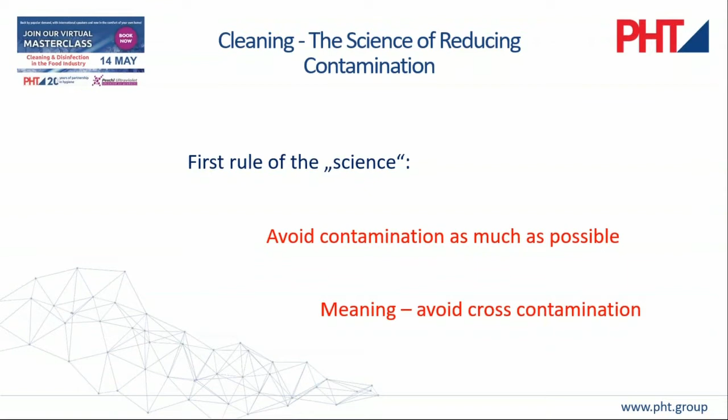And when we talk about avoiding contamination, it's basically please avoid cross-contamination. That's something which doesn't cost you a hell of a lot of money. It's just something you have to plan and think about — where it comes from, where does the contamination come from. And when we talk about cross-contamination, let's start with the personnel flow.

Cross-contamination in terms of personnel is one of the most important things which you should do. And that's easy - you just have to do it. When you think about the change room, make sure that people coming from the outside and people who are properly dressed and going on the production floor don't meet each other, don't hug each other, and don't have too much contact, because that's where contamination comes from. Again, nothing which costs you a lot of money - just make a plan so they will not meet and you don't have cross-contamination.

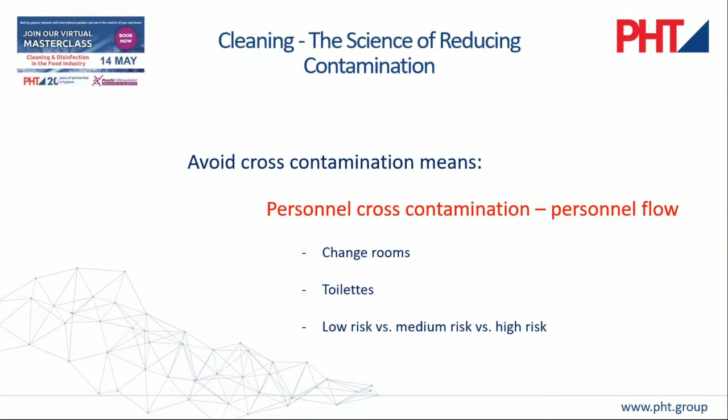The same with the toilets - make sure people coming from the toilet have proper personal hygiene before they meet other people. Again, when you look at low risk, medium risk, high risk areas, it's fine - just make sure people working in those different risk areas don't meet each other without having some lobby in between, however it looks. It doesn't have to be fancy - it's just a matter of planning the personnel flow the right way. That's all there is to it. It's not a big science, just a couple of small things done right. So avoid cross-contamination between all areas with different hygiene levels. That makes a huge impact.

We talked about the personnel flow, but we should talk about product contamination as well. Make sure that products which come from different areas don't meet each other - for example, raw and cooked products. Make sure in your product flow on the production floor that raw and cooked products don't come close to each other. Packed and unpacked products - make sure there is a lobby in between, however it looks. Again, it doesn't have to be a fancy lobby, just make sure the flow is right.

Packaging material versus food products - make sure that wooden pallets and other stuff are not on the production floor right next to open meat, for example. Those things have a huge impact, and we shouldn't talk about cleaning before we get this right. It's the same issue - just make sure that in areas with different hygiene levels, the products don't have contact with each other.

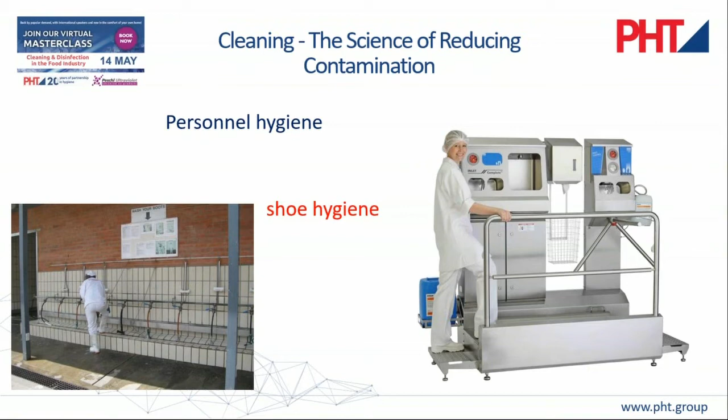Therefore, we believe in a walkthrough system, however you call it. Coming back to what I said before, to divide the dirty side or the clean side, between dirty and clean, between white and black, however you call it, in terms of dirt. That's the only thing which makes sense. Otherwise, you do things which don't really make sense.

And then when we talk about the personnel flow, as I said before, we have, of course, to think about the factory itself as well. Beside the fact, again, that we have to avoid it, we have to think about the factory hygiene. And even here, that's why I'd like to repeat it again.

Think about it: if you have to clean something, then please think about, you need time, you need temperature, you need some type of chemicals, or not only one type. We heard about resistancy. That's why we choose always to say, if it comes, for example, to foam cleaning, you have to swap between, let's say, an acid and an alkaline, or at least between different chemicals, so that the bacteria does not get used to it, because otherwise it will not work at all.

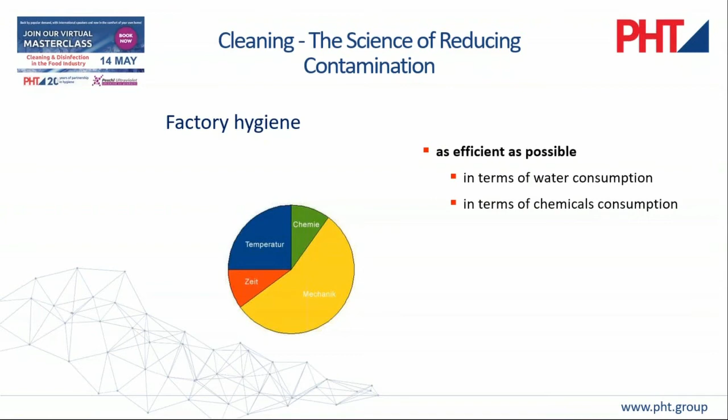And when we talk about the factory, to clean the factory, of course, it should be as efficient as possible. There is no doubt, in terms of water consumption, in terms of chemical consumption, in terms of energy consumption, and of course, in terms of time consumption. So cleaning, of course, it has to be done properly, but more and more it has to be, of course, as efficient as possible, and of course, as secure as possible.

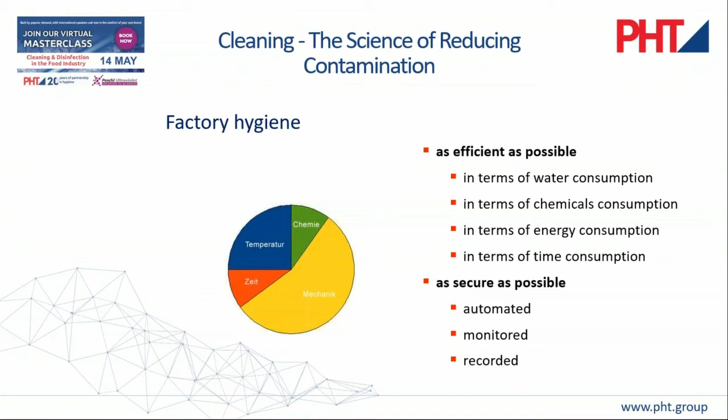That's why we tend to go more and more to do process by process, as much as possible, automated, so that we are not depending on people and how good they are at the moment, and how they are happy or not happy, and if they are doing it properly or not properly. So we try to do it more in an automated process, which we can monitor, and of course, we can even record. So if somebody is asking us, what have you done? We say, okay, we have done it from 8:10 to 9:10, and we have done it in this way, with this temperature and everything. So to say, we made sure that everything is fine.

When we talk about, first of all, manual cleaning, then we talk, even if it sounds very simple, about brushware. And I tell you, there is a huge difference between brushware and brushware, if we talk from a hygienic point of view.

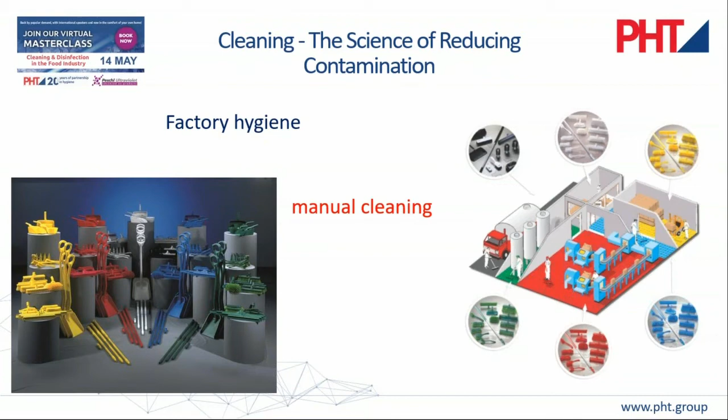And that's why you can see it, small, easy thing. That's a color code. If you just start to say, okay, my brushware is color coded, and as you can see on the right hand side, my factory is as well color coded, then you see it's far easier to make sure that the brush which you're using outside is not being used in the high care area, and the brush which you're using in the slaughter area is not used somewhere else. And therefore, that's easy, small things which help a hell of a lot. I just see, I think I have to be a little bit faster, otherwise I'm in trouble with Linda.

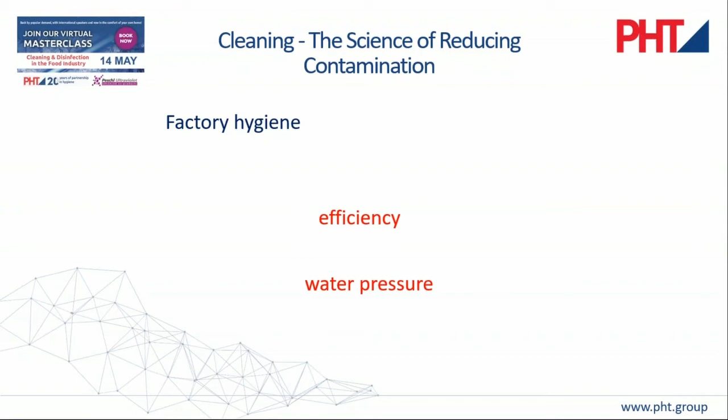We realized that if the water pressure is too low, for example 3 bar or even less, it's not very efficient. But if we increase the water pressure up to 22 or even more bar, the water consumption increases as well. So there's something in between, let's say 18 bar or something like that, that's the most efficient way of having the water pressure to be as fast, and therefore as efficient as possible.

It does have a big impact if you use foam or not. We did a lot of trials, and I think it's funny, I see it often, people standing with 3/4 inch hoses with cold water trying to clean the facility. That just doesn't work, because you don't have temperature, you don't have any chemicals, so it doesn't work at the end of the day. Everybody knows if you want to clean fat with cold water, it might be possible, but it's not easy and you'll struggle. So it doesn't help. We found out that if you use foam, it's far faster, more secure, and far more efficient.

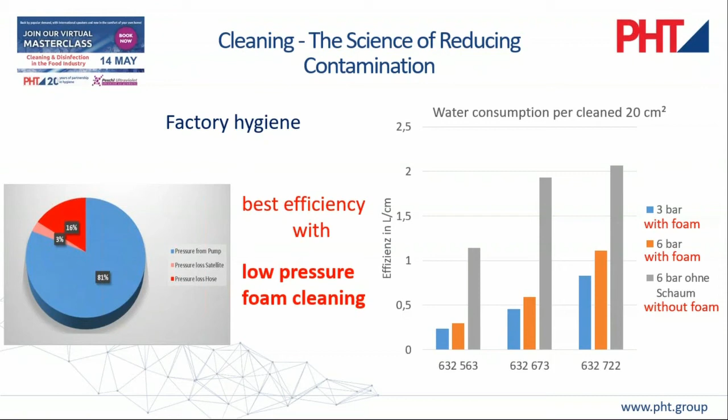So for us, with all the investigations we did, the best and most efficient way is low pressure, meaning around 18 to 20 bar foam cleaning. That's the most efficient and best way to do it. It should be as easy as possible.

There are developments on the market where you just have one handle and a color code, meaning that's acid, that's disinfection, that's alkaline, that's rinsing. You don't have to mix by yourself and put chemicals into water. The system does it by itself. You just link it up with a canister, and then the people have to go. You don't need cleaning staff with a university degree. So make it as simple and as easy as possible, I think that's very important as well.

So therefore, we say low pressure foam cleaning is the way you should clean in your facility.

Even if it's a mobile unit, you can start with a mobile unit to use in different areas where you don't need to clean every day. You can have units with a wall-mounted main station including the booster pump, or a booster pump based in a separate room with your compressors and other stuff. That doesn't matter, it always depends on how often you have to clean, what the area is, whether you clean daily or not. But that's the way to do it from our point of view.

There's no doubt that cleaning has to be done on a regular basis, however you do it. If you do it regularly, you'll see it's easier, faster, the people get used to it, and then it's working. This funny one-month deep cleaning doesn't make any sense, because then it's really hard work, since in all the corners you can see the yellow shining and everything starting. That doesn't really help. Do it on a manual and regular basis, and you'll see it's working.

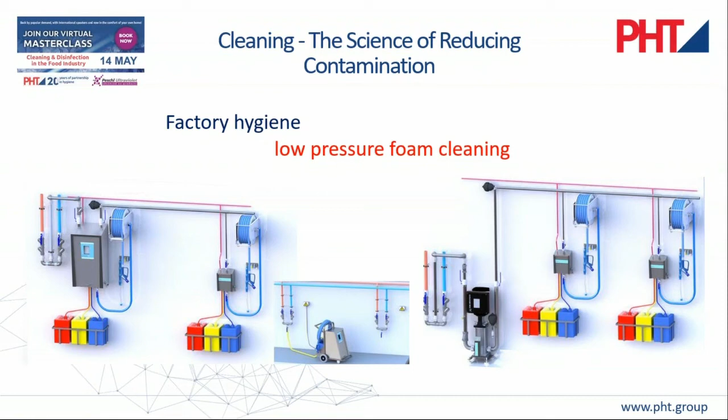You can have central and decentral cleaning, it doesn't matter. That's as well depending. Now a short one minute video to show you how the people do it.

It should run now. It's running now. How to clean. Linda, are we still good on time, or am I running too late? I haven't looked.

You see, this guy is rinsing first, then he is foaming. As you see, he just has one thing to turn, and then he's rinsing from top to bottom, and then foaming from bottom to top. Then you just need some time, let the chemical work, and then you rinse it again.

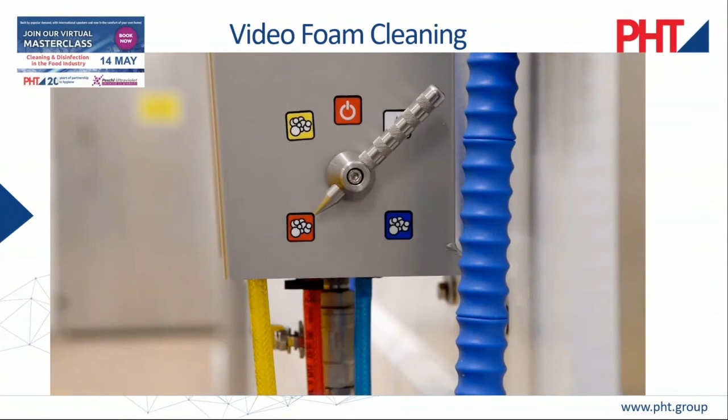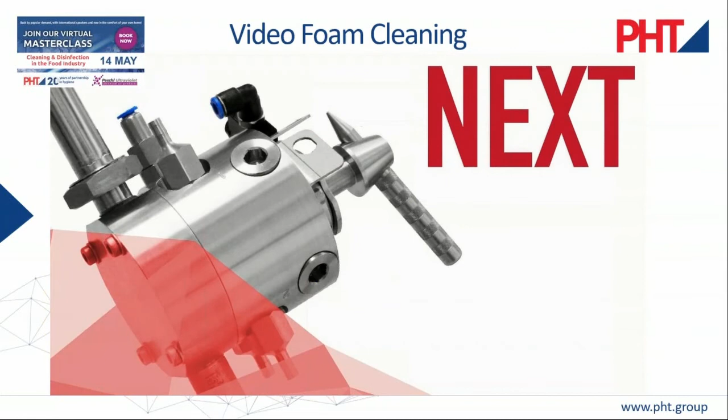That's a very easy and quick way of doing it, and if you do it on a regular basis, it's even easier. With brushes you will never reach every corner, but foam goes into every single corner, so it works far better. Then depending on whether you foam disinfect or rinse disinfect, you rinse it again and that's it. If you plan it properly, it becomes fast and far, far better.

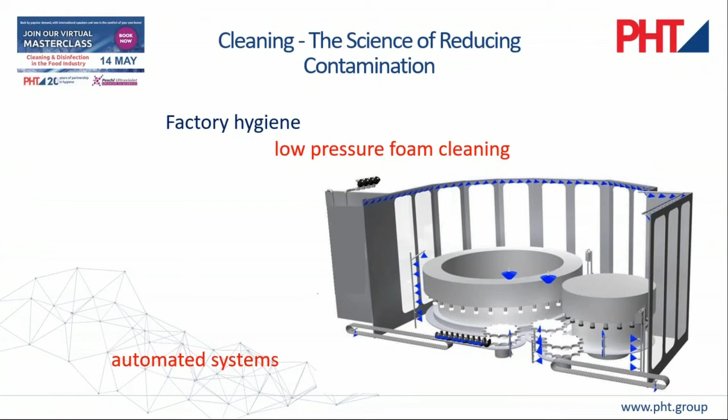We more and more go to automated systems, where units are linked up with a conveyor and nozzles. If you clean a conveyor belt by having someone stand 20 minutes in front of it, it's not a funny job, so we shouldn't wonder it's not working well. That's why we increasingly use nozzles linked to an automated system that rinses, foams, and rinses again, whatever is needed, and we know it's done the way we want.

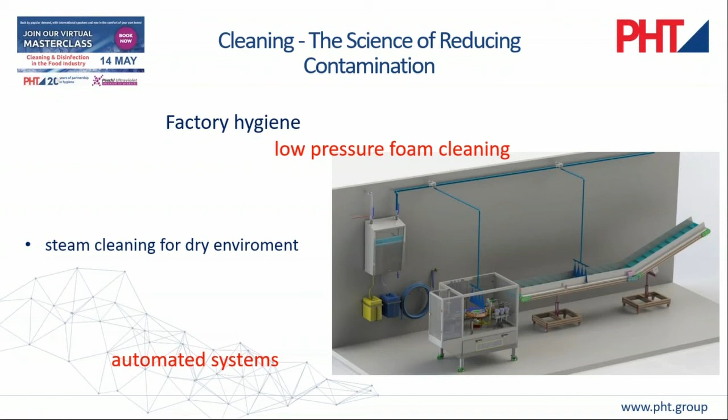Sometimes we even use steam cleaning in very dry environments to avoid making things too wet. More and more, we scan afterwards with fluorescence to make sure the belt is cleaned. The target is to have a sensor and clean the conveyor belt until it's clean, not just for 10, 15, or 20 minutes. This clean check is becoming more and more part of the process, to record that the belt was clean.

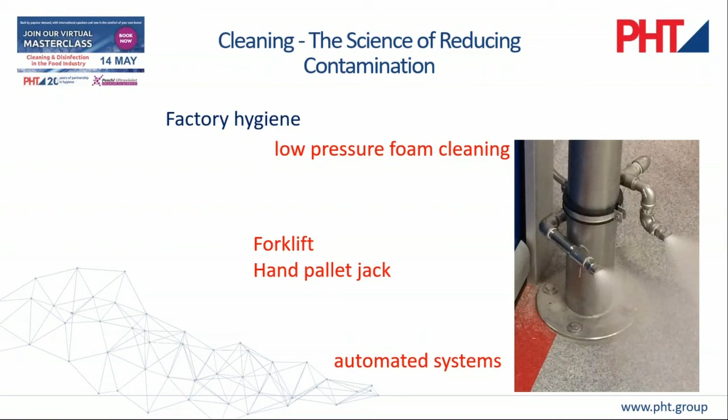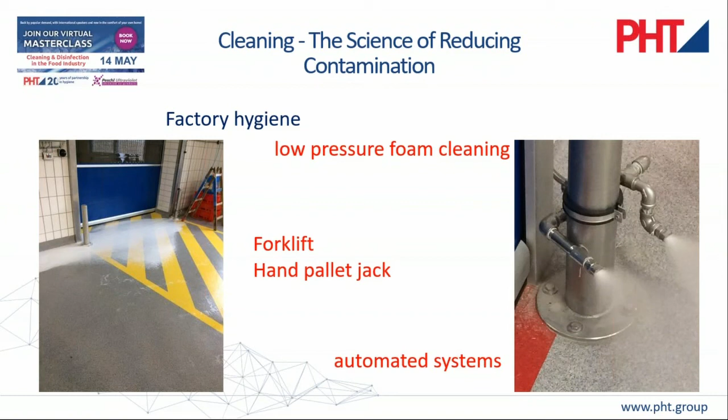As I said before with forklift and pallet truck checks, we should think about the wheels. How can we make sure the wheels at least get sanitized? It's always best to avoid cross-contamination, so maybe have forklifts outside and other forklifts inside — that's the best way. But if you can't avoid it, have a unit that automatically sprays sanitizer on the floor, so that whenever you drive through, at least the wheels of the forklift or pallet truck get sanitized.

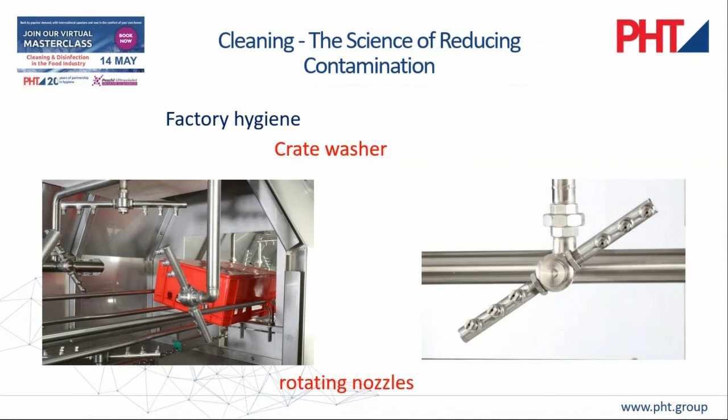The same applies to crates — you can't bring crates from outside into the factory, as it would be a big source of contamination. The new development in crate washing machines is rotating nozzles, which are far more efficient than static nozzles. It's very similar to a dishwasher — they use rotating nozzles too, and there's a reason for it.

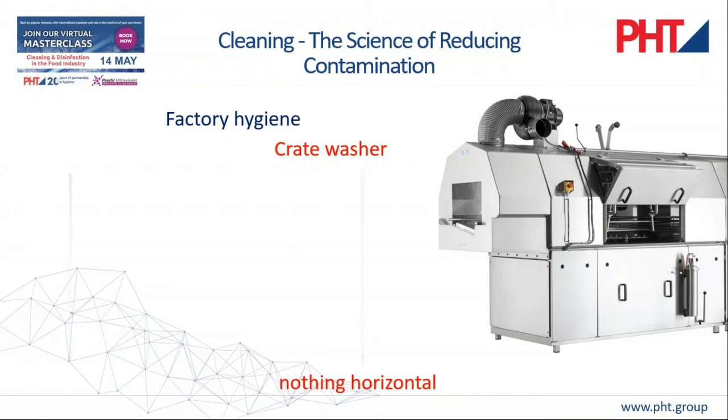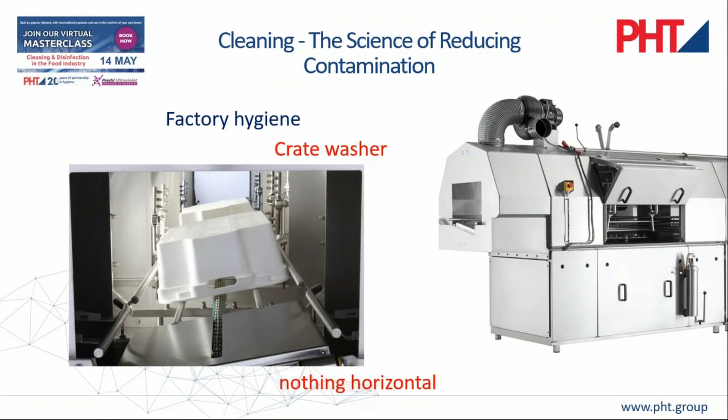Professor Peter Host said before, and I think it's very important, that you have to make sure you're able to clean whatever equipment you use. If a crate washer doesn't have a hygienic design and you can't clean it properly, it won't work long term. Make sure all surfaces are sloped with no horizontal surfaces, so water can fully drain and nothing can stand on the units, regardless of which unit it is. Even the crates should move through the machine on a slope, to avoid carrying too much water from one section into the other.

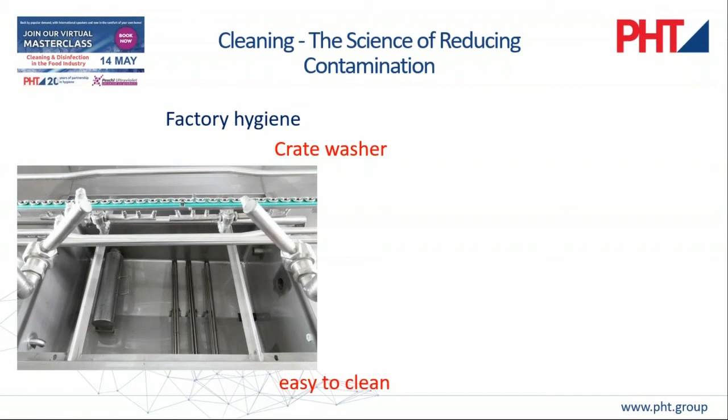That's very important, as we heard. You have to make sure all the equipment is designed to be easy to clean — that the tank is accessible, that you have great big windows to go in, and that every corner can be reached. I've seen a lot of washing machines so dirty that I refused to touch them. How can we expect a clean product or clean crate to come out of a machine like that?

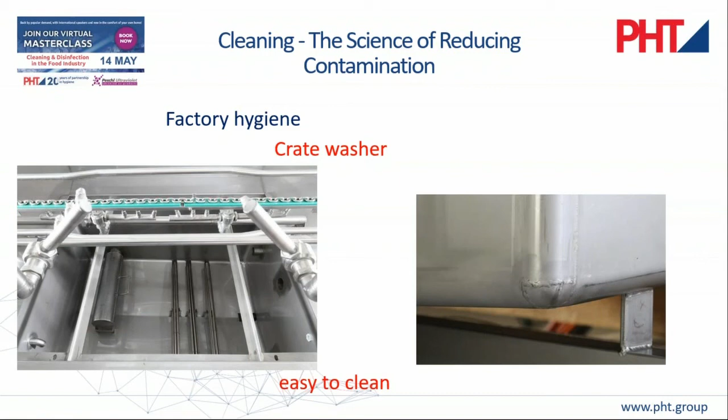So make sure the machine is designed to be easy to clean, with round corners so it's really perfect and easy. What I think is very important too: the wastewater tubes of a washing machine have to be designed so you can take them out, put them back in the washing machine, and clean them.

Otherwise, it's a disaster, what we heard about biofilm. You can imagine what type of biofilm will be in a tube like that if you are not able to wash it. I think that's a lot of small but very important details if we talk about a machine, especially a cleaning machine.

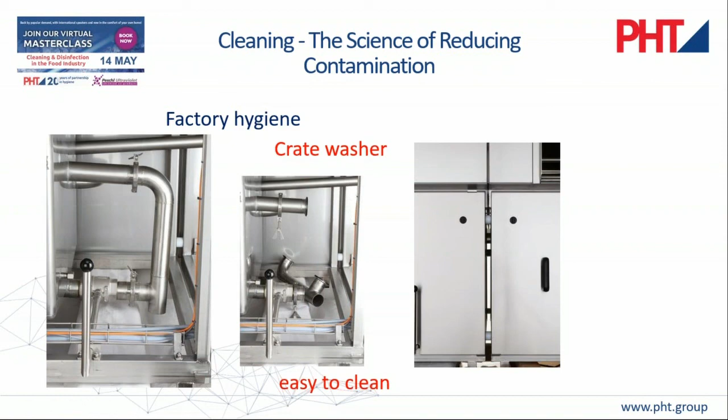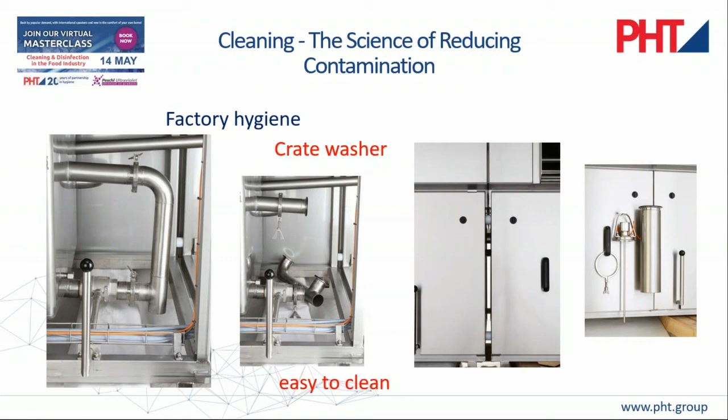Make sure that between all the elements of a machine there is a gap that you can wash through, a gap where the air can go through so it can dry out, and that you don't have surfaces very close together, so they won't stay wet and cause bacteria growth. Make sure all the filters, level switches, whatever, are outside so you can clean them properly. Otherwise, it will not work.

Again, you can't expect a washing machine which doesn't work, which you can't clean properly, to give you good results.

The development, I think, in terms of drying of crates will go more and more away from the blower, the air dryer, because when you look at those units in detail, all these air tubes in detail, I believe you might clean the crate well in the washing machine, but later on in the dryer, you bring all the bacteria back.

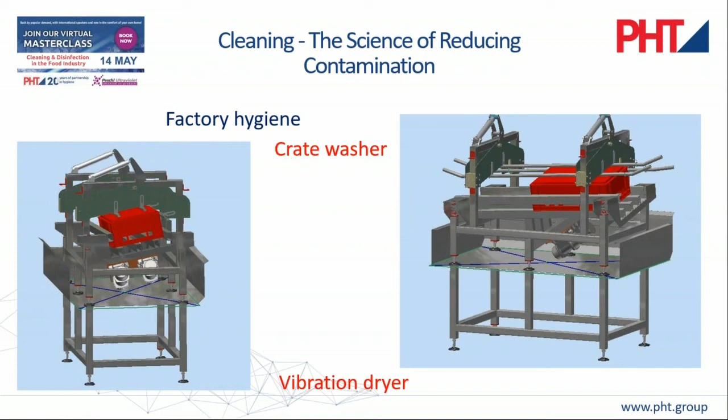So we are developing a unit which uses vibration, to vibrate the water off the crate, and therefore make sure we don't recontaminate the units again with contaminated air. We're developing as well a steam disinfection, because that's very important too.

You can do a chemical disinfection, no doubt, and you can do a hot water disinfection. But we agree that in principle it should be more than 82 degrees hot water to disinfect the crate. Even in the boiler there might be 82 degrees, but by the time it comes to the nozzle in the machine and comes out, it might be 70 degrees. As it reaches the crate, it might be 65 degrees, and the surface of the crate is maybe 60 degrees. So at the end of the day, it will not work. For me it's something to keep some people happy, but it's not really working.

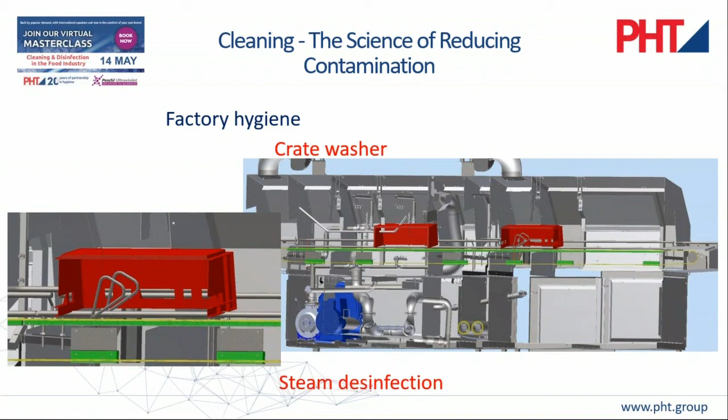So we said the only thing which really works is a short steam disinfection. That's the only way we really get heat disinfection - anything else doesn't make sense. And of course you reduce water consumption, which we think is more and more important, especially water consumption. I don't have to tell you guys in South Africa how important water and the availability of water is. That's why we're developing more and more things like that.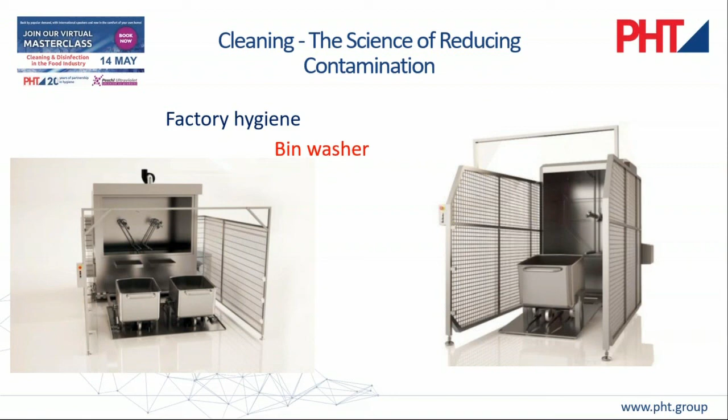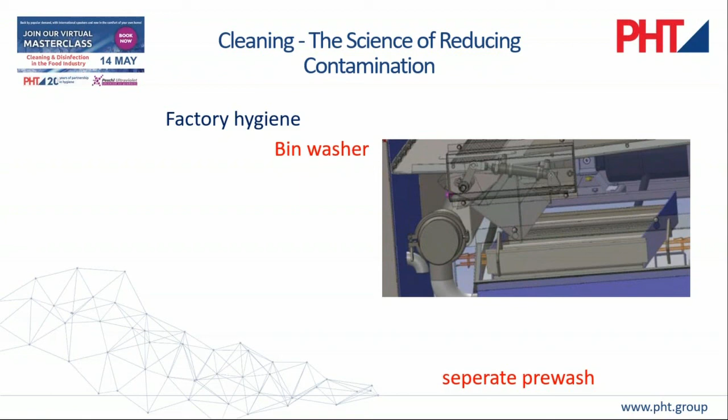And what about crates? It's the same for bin washers. I think you have to think about how to wash your bins - it doesn't make sense to have contaminated bins again and again and again. So there are developments in terms of bin washers that we have. One thing is to have a separated pre-wash, meaning the first very dirty parts coming out of the trolley are put separately, straight into the drainage system, so as not to recontaminate the water.

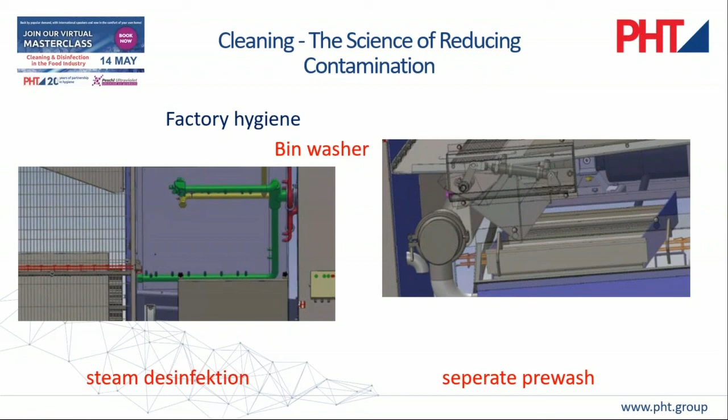And there are developments on the market to have the bin washer steam sanitized as well, which we think is very important. And of course, because of the heat of the steam, they are drying much faster than before.

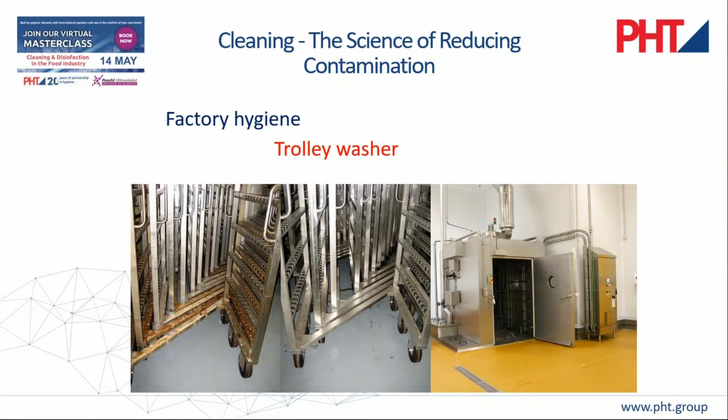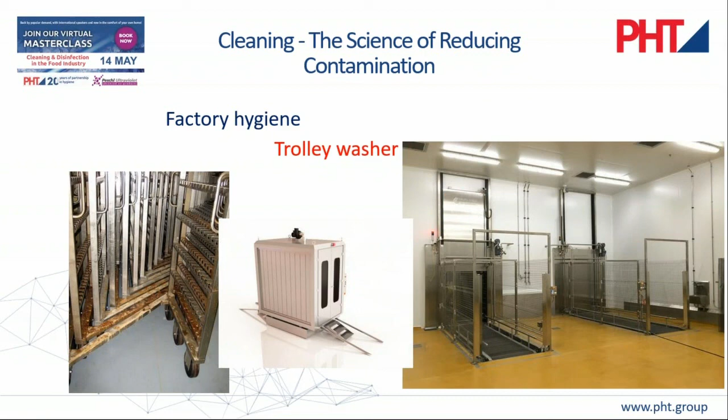The same goes for smoke trolleys - there are units to wash those trolleys, and units where you push in on one side and it comes out on the other side, which we think is especially important, as I said in the beginning but have to repeat again, to split the raw and cooked product sides, so there's no cross-contamination from one side to the other. If you have a washing machine where you push it in on one side and take it out on the other, that's far better than having it only in one direction.

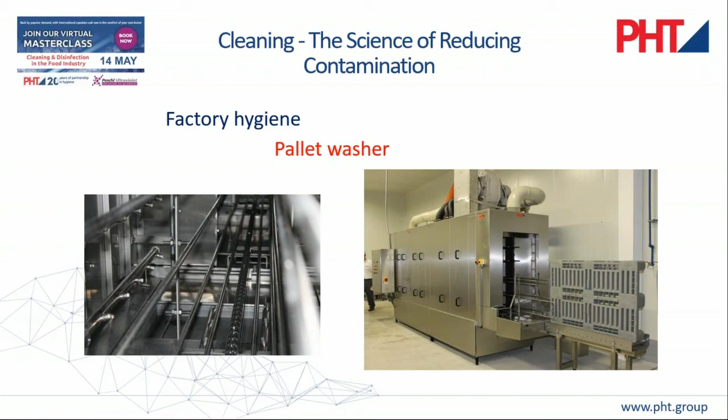The same applies to pallets, which maybe aren't as strict, but be aware that even pallets need to be cleaned, and you have to think about what type of contamination you will bring into your factory with things like that.

At the end of the day, I can just repeat myself: cleaning is not a science. Just take it seriously, make a plan, and follow through on this plan consistently, and then you will see it's easy.